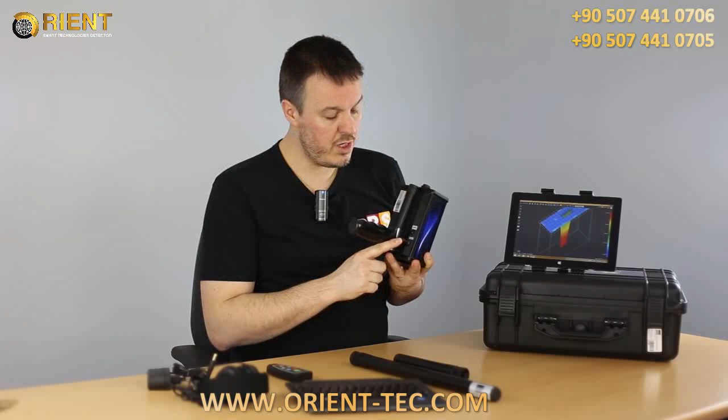Here is X1 Pro. Here's a button to calibrate the long range mode. Here is the charger. Here is the plug for the headphone.

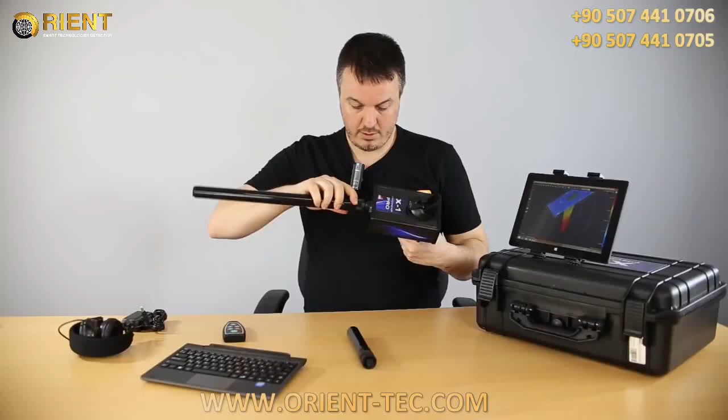Then we choose the gradiometer sensor. It's very easy to plug in. We do it gently, then we screw.

Also we can use the long range sensor if we want. To turn it on, it's here, this button. And then all the options come here.

Then it pairs automatically with the Bluetooth joystick. Magnetic detection, first mode. Then magnetic detection, second mode.

We can have live scan, meaning that the scan appears directly on the tablet PC. Then you have automatic scan and manual scan. Basically, the difference between the two.

In one, you will make one step and push. Every time you make a step, you push start, and then it appears on the screen. Or you can choose automatic, and then you tell the computer that you're going to make 5 steps, for instance, and then it will do it automatically.

Then what else do we have? We have memory scan. You can scan and store the scan in the device, then put it back in the PC later. You can format the memory to get rid of the scan.

You can transfer the scan to the PC. And you can check the battery status. Then we're back to long range mode. So it is very easy to operate.

Now I will show you how the software works. DRS has developed its own 3D software that you use with all its devices. We will show you how it works. You use this software to scan and give an interpretation to the results.

So you have to start first the software. The software is very easy to use. First thing, you have to choose the language. Here, click on File. Language, English is good, but you also have 8 other languages.

Connection settings. You have to select the number of columns you want to scan and also the number of rows, and you see it makes a grid. Each square measures 30 by 30 centimeters and it's a step.

We always start on the lower right hand corner. And then, very important, you have to choose how you're going to scan. You choose to scan either parallel, you go like this, then you go back, then again.

Or you can choose zigzag. You see, you start here, you go like this, you step back, you scan, then like this, like this.

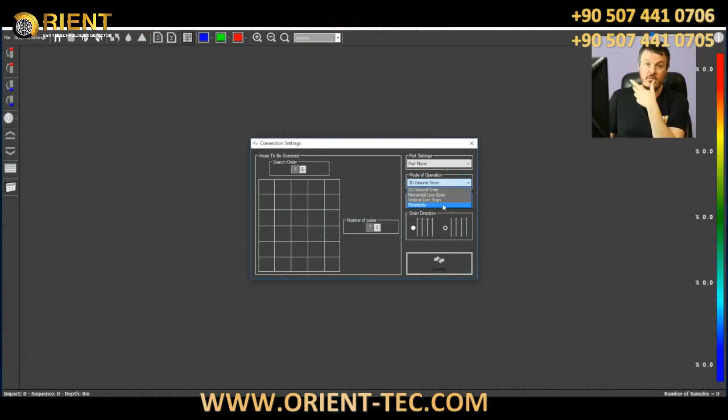Then you have to choose which kind of scan you're going to do. 3D ground scan is what you use for all our radar series. Horizontal live scan and vertical live scan are used only with X1, X5, and X1 Pro. And resistivity is for IRS or the resistive feature of X5. But here we're going to use ground scan, and then you just press connect.

We'd like to remind you that on each DRS device you can choose manual or automatic scan. For automatic scan, the machine will beep, so every beep you make a step. It gives you a rhythm, a very nice feature. Or you can use the manual feature, where every time you make a step, you just press the joystick.

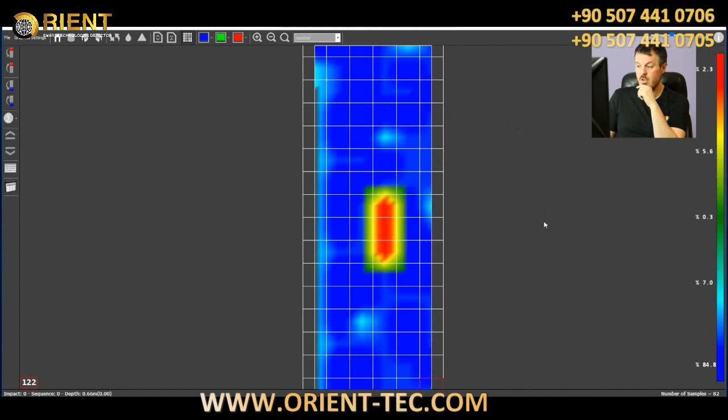Now let's see the file. We've just recorded an iron object. Here it is. Let's start with 2 dimension. You see here a red square, always in the lower right hand corner. So basically we've been scanning 16 steps by 6 columns. So 16 steps of 30 centimeters, that's barely 5 meters, by 2 meters.

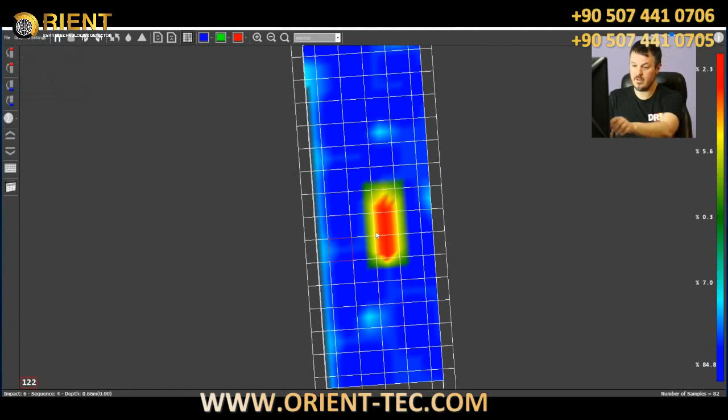So look, you can navigate like this with the keyboard, or you can also use this thing. There is an embedded keyboard here, but we will use this. Every time you move the cursor, you can see on the lower left corner that the value changed, 122. Now here, where the object is, we have 234, meaning that we definitely have a metallic object.

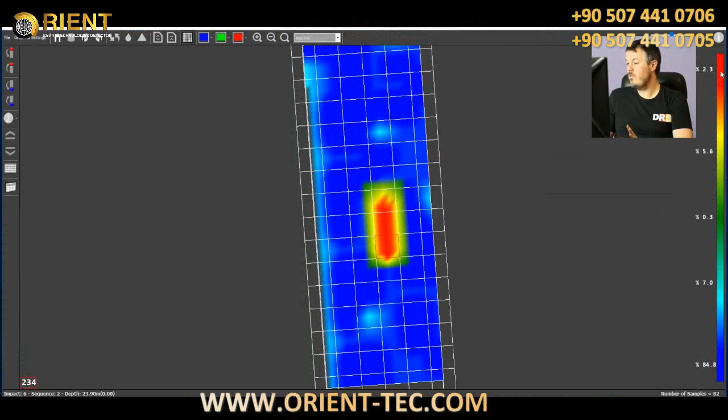How can you make sure it's a metallic object? When you open a file, you can see on the right corner a scale of color. If the metallic object is red, yellow and orange, if the total of the first 2 values, see 2.3 and 5.6, where it's barely yellow-orange, if the total is below 10, then you can imagine this target is metal. Let's see, 2.3 plus 5.6, that's 7.9. So definitely red here marks a metal object.

But the blue, definitely we say it's cavity, but not always. It can also be a field that has been turned. So here we have 84.8 for the dark blue. If it is a cavity, it has to be 100%. If it's below 100%, it's not cavity, it's just ground. So here, 84.8, it's not cavity. Here we have a metallic object, definitely, but it's not in a cavity, it's just in regular ground.

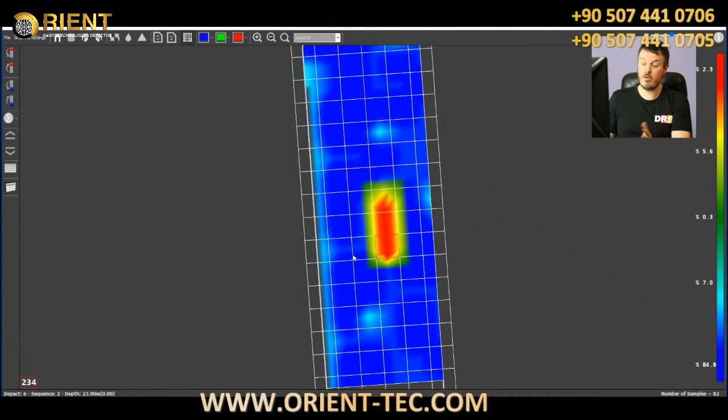How can we determine the size of the object now? We have 3 squares for the length times 30 centimeters, that's 90 centimeters, let's say 1 meter. Let's imagine the width now. The width is just 1 square, see, 1, 2, 3, so that's 30 centimeters. 1 meter by 30 centimeters. The buried object on our field test is basically an old rusty pipe.

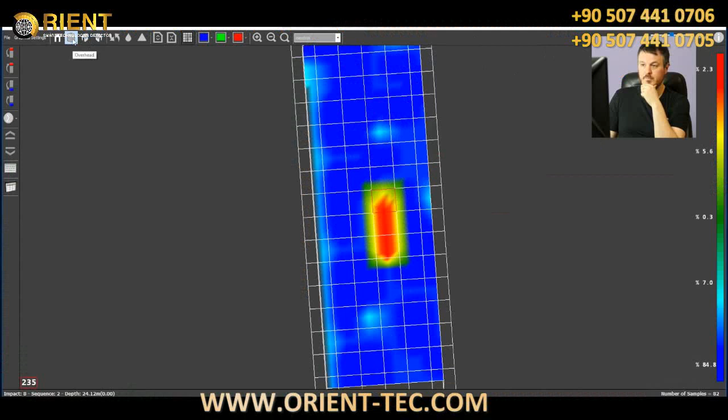Now let's try to imagine what kind of depth we have here. Okay, so let's go 3D. You can see the depth is here. The first thing you have to do when you open your file is tell the software which kind of soil you've been scanning. Here we use sandy. Remember that the percentage of humidity, the type of ground, if it has rocks or not, will really influence the result you obtain on the software.

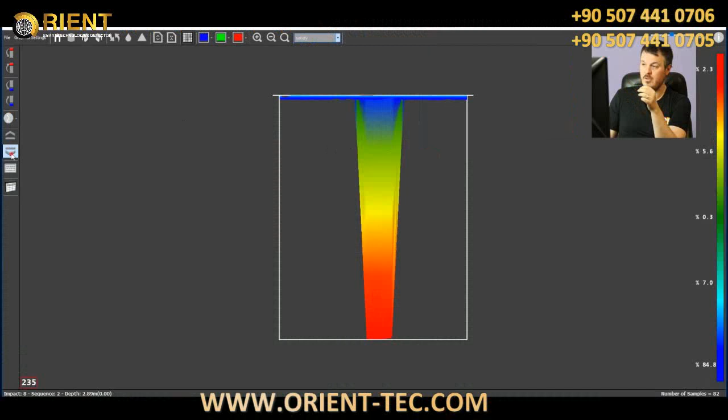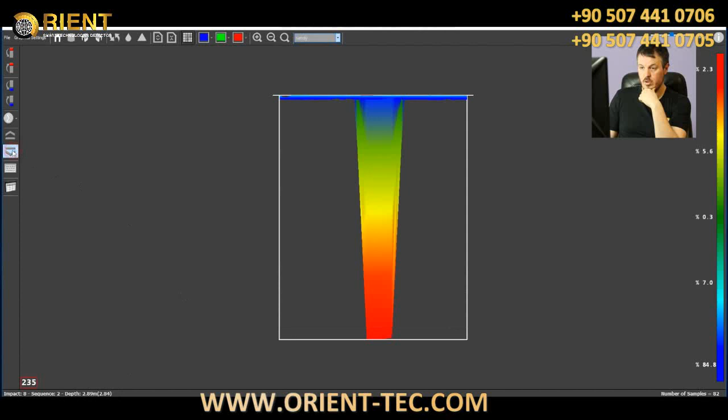So sandy is pretty neutral. Let's use these 2 arrows on the left of the software to determine the depth. So the object starts around here, at 2 meters, you see 199, and goes to, sorry, to 270. So our metallic pipe is below 2 meters and goes to 2 meter 70 deep.

Okay, since it's a pipe, it's round, it's 30 centimeters wide, so it's very good and accurate. So you have a 30 centimeter pipe between 2 meters and 2.70 meters deep. Very interesting here, you can see that there is a very visible cut. When the red is cut like this, it's metal, but most of the time it's iron. When it's cut like this, it's iron. It means that the signal has been cut, and you have a really high percentage of chance to determine that this is iron.

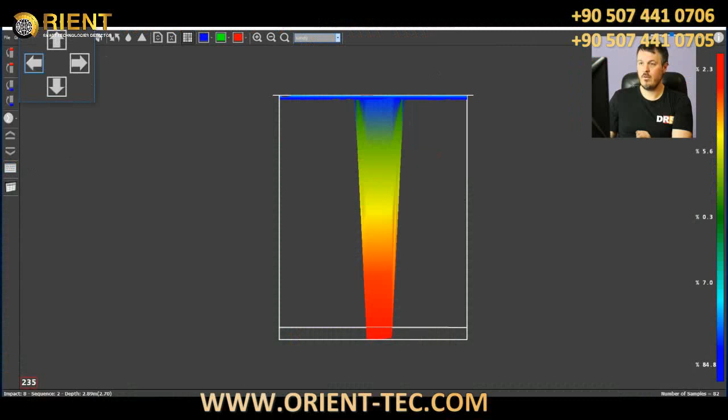Finally, we'd like to show you this. Let's get back to 2D. You see here, we move the cursor and you see the object is here. Okay, you see it's still moving here. Our object is here and you can see the value here. Look, 235. Let me show you.

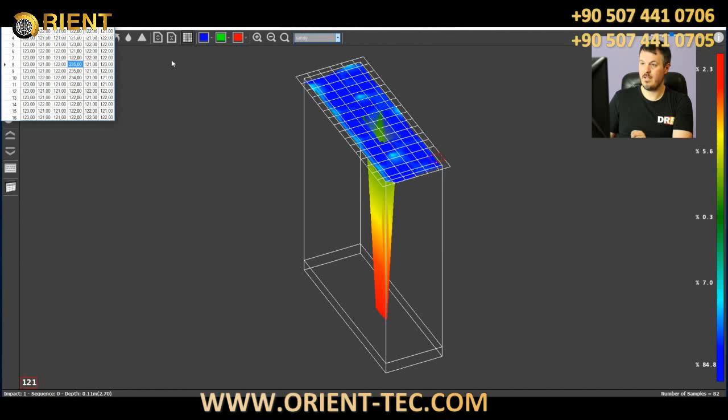If we get back to 2D, okay, let's open this. You see it's here. Our value that intersects is 235, 235, 235, 234, and it's row number 4. 1, 2, 3, 4. You see, and it's step number 10. 1 through 10. Basically, it's here, you see, so it's perfect. You see the value here, 235, 235, 235.

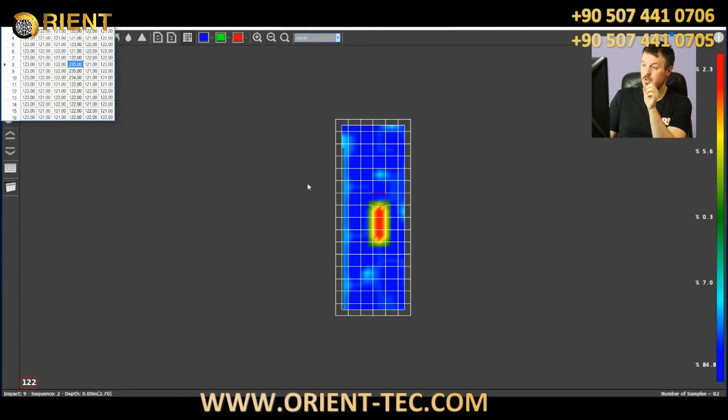That's our metallic object, and you can see the scan values appear and are interpreted directly by a color in the software. So you see, it's very, very neat. You can determine the size and the depth of the object, thanks to our DRS 3D software.